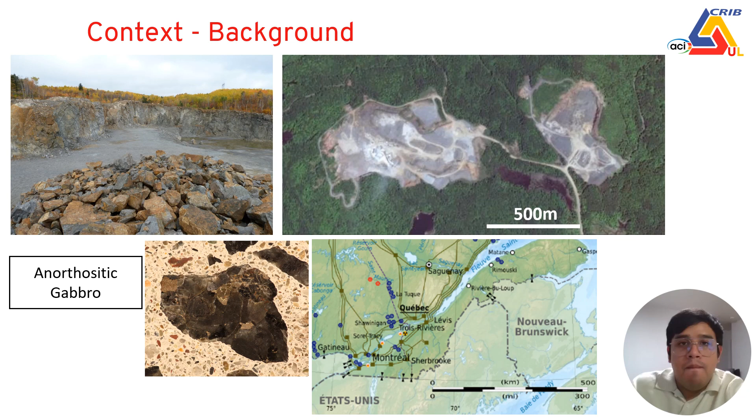So when we use this type of aggregates in concrete, two main reactions will happen if water and oxygen are available in the system. First is the oxidation process, and the second is the internal sulfate attack. I will explain in detail in the next slides.

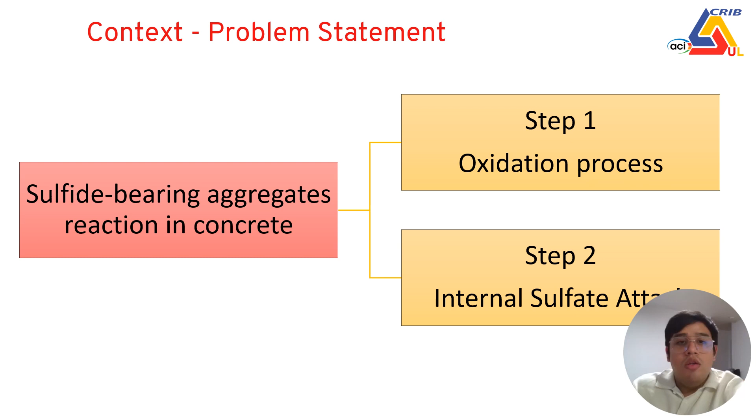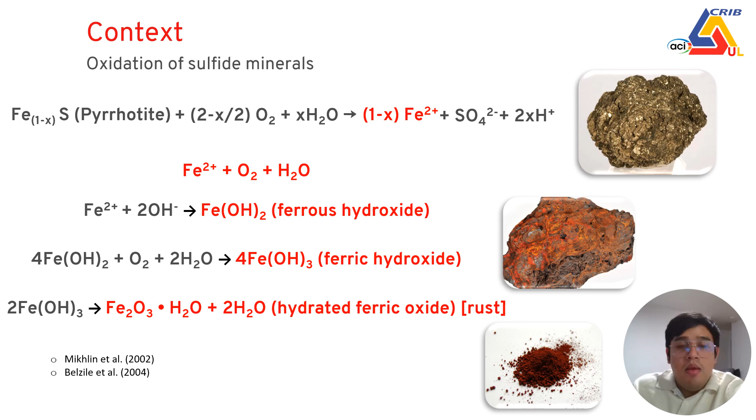So for the oxidation process of the iron sulfide minerals, principally pyrrhotite is the most reactive one, that can be activated by the oxygen and the water, so the iron will be released and will continue reacting with the oxygen and water available in the system to form the iron oxides or the iron hydroxides, as you can see here below. And we know the most common is the rust material, but this is not the only reaction.

So after the oxidation process is done, the iron sulfide mineral will continue releasing sulfur, and this sulfur will transform into sulfuric acid that will attack portlandite to transform into gypsum. And if we have water and an alumina source from the cement paste, the C3A, it will transform into ettringite.

And if we have the ideal conditions, like a source of carbonates, the silicium from the cement paste, and more water, we can form thaumasite. And thaumasite is a really destructive mineral for the cement paste. You can see here in the picture a concrete affected by this reaction.

Normally, there will be a whitish color around the aggregate. We say O-ring, and this O-ring is an indication that severe internal sulfate attack has already happened in the cement paste.

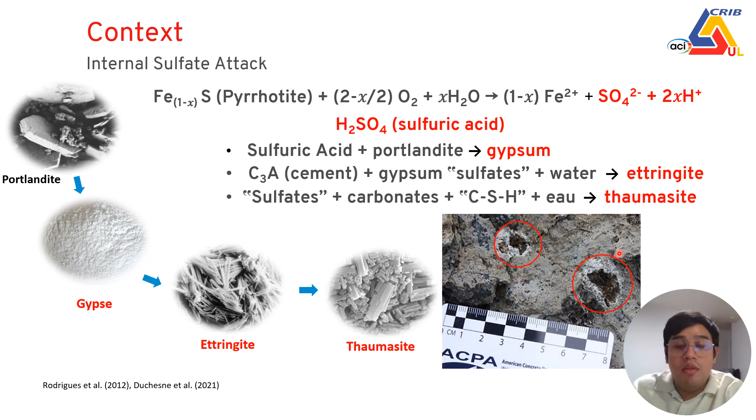Both reactions mentioned before will create secondary products that are really expansive. So they will start creating microcracking in the cement paste until it reaches the surface, as we can see here, in a bigger size map cracking effect.

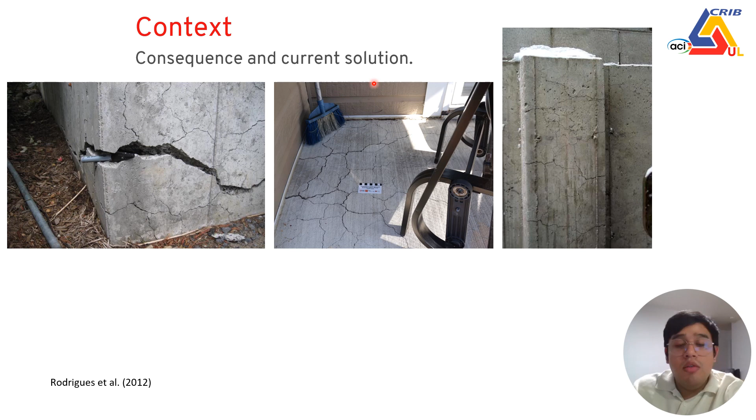So for this problem, there was not an easy solution, and the only solution that they could think of was to lift the houses, and the people were living there for around 2 months, and after that they reconstructed the foundation and then placed the house again on the site.

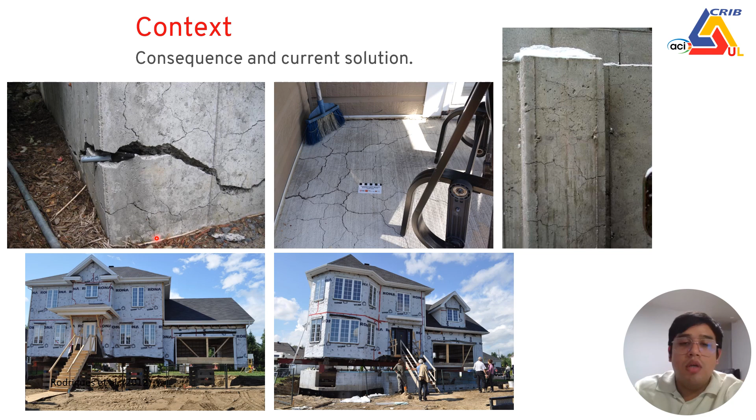So now I'm going to talk about the literature review that I have done for this project. During 2010 to 2015, there was a big project at University Laval to try to develop a protocol to evaluate the potential oxidation reaction of the sulfide-bearing aggregates that consists of a step-by-step process.

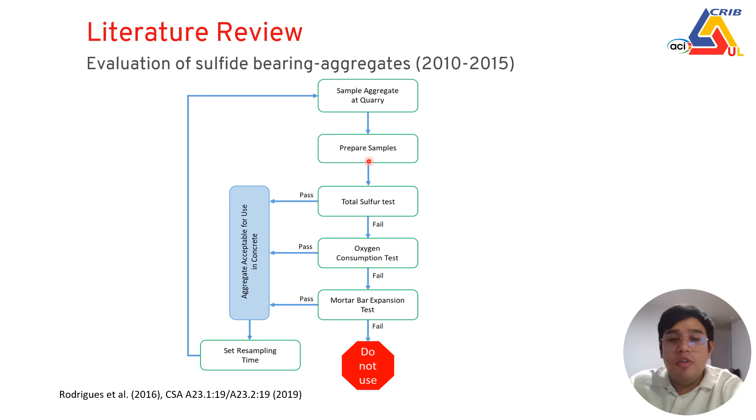So the first step is to prepare the samples, and after the samples are prepared, there is a total sulfur test to quantify the sulfur in the aggregate, and then an oxygen consumption test to see how the oxygen is consumed by this type of aggregates.

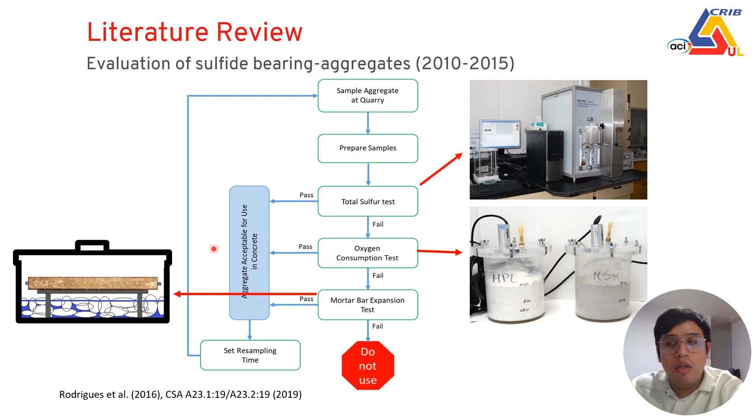And finally, a mortar bar expansion test where we measure the expansion to see how these products will be created in different conditions. So there are two different conditions in this mortar bar test: the oxidation with high temperature and low relative humidity, and the other condition that is low temperature and high relative humidity.

But there is not only one oxidation reaction in civil engineering work, so there is another type of oxidation reaction in concrete elements that we know as corrosion. As you can see here on the pictures, there is the iron attached to the steel bar that can suffer by the oxygen and water available and other agents that can accelerate or promote this type of reaction. So

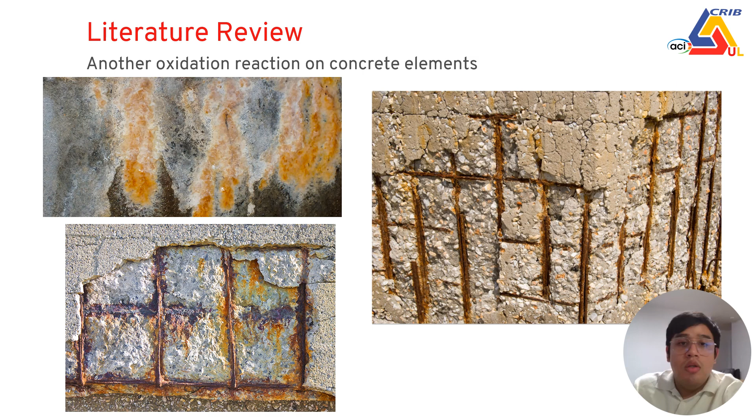a particular case grabbed my attention because there is something that we call pitting corrosion. And this pitting corrosion happens when chlorides arrive to the system. And this chloride will attach to the iron that is being oxidized. So this will create new products, and these products will release to the pore solution. Unfortunately, these new products are not in good connection.

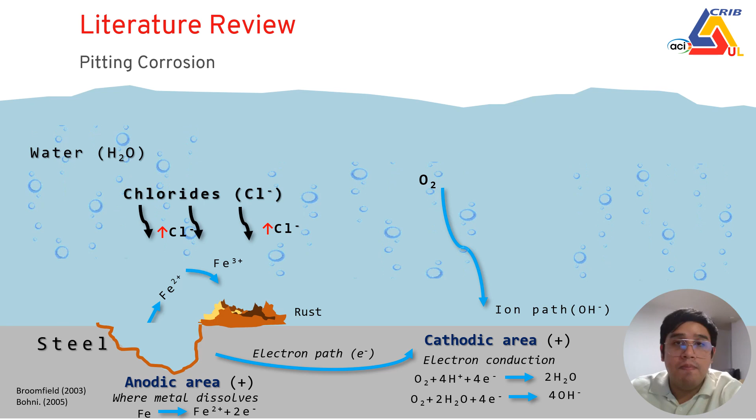They don't have good connection, so they will separate, and the iron will be free in the pore solution, making it available to the oxygen and water more easily to create more rust products. This is a way that we can accelerate or improve the corrosion in the steel bar. Based on all this information, I developed my research program.

Now you can see the big picture of my research project that starts with making new concrete under laboratory conditions, and we select two types of improvement of the oxidation with two different techniques. Today, I'm going to concentrate just on one, that is the electrochemical treatment, that consists in the chloride impregnation and the impressed voltage test. I will explain in detail later to generate or improve the oxidation.

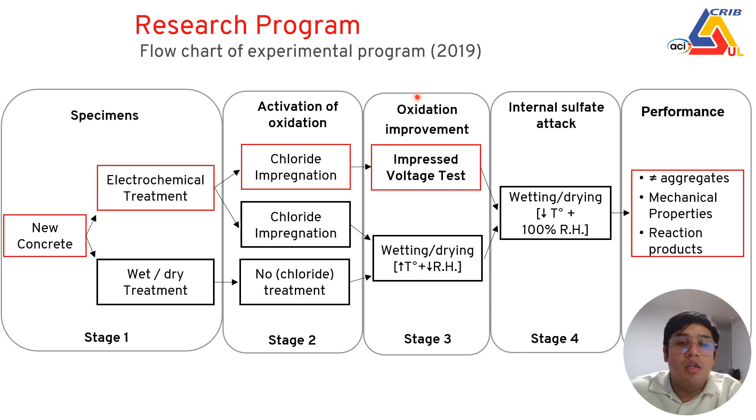And then we try to pass these specimens to a condition to generate the internal sulfate attack with low temperature and high relative humidity to see the performance of the aggregates after being submitted to this treatment. Now I'm going to talk about this methodology, how I developed this methodology.

So this methodology starts with the chloride impregnation of the electrochemical treatment. It's when we put a concrete specimen in an electromigration cell, and with the help of the voltage we generate the electrolysis of water, and chloride will be free in the system. This chloride will try to migrate to the positive part of the electromigration cell within the time. So we just need to wait.

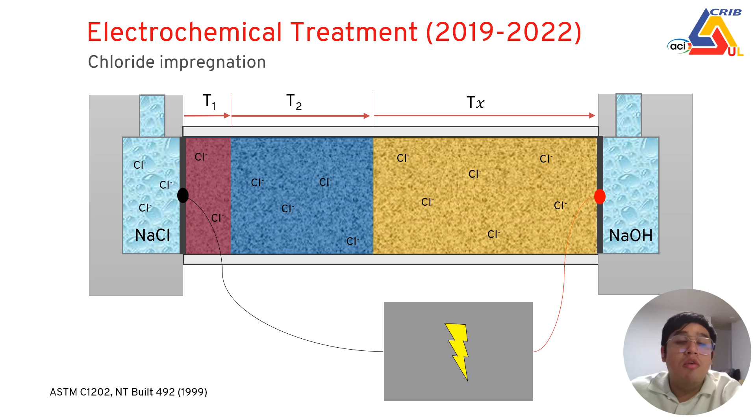This chloride little by little will migrate along the whole length of the concrete specimen until it reaches the other part of the solution. But it's really important to say that we need to control different parameters to avoid different attacks that cannot be involved in the damage of the sulfide-bearing aggregates.

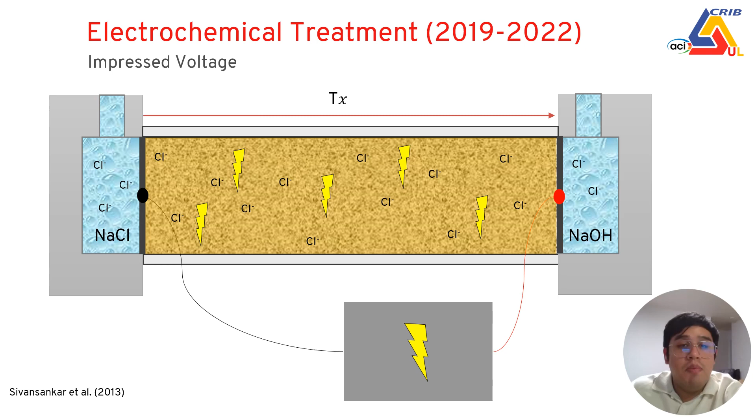The next step is to maintain this current for a long period of time to improve this oxidation reaction of the sulfide-bearing aggregates. And this part we call the impressed voltage test. To reformulate this testing for our purpose, I have to try with different materials, and during the early 2020s, I started working to develop a new electrode that can allow me to have the condition that I explained before.

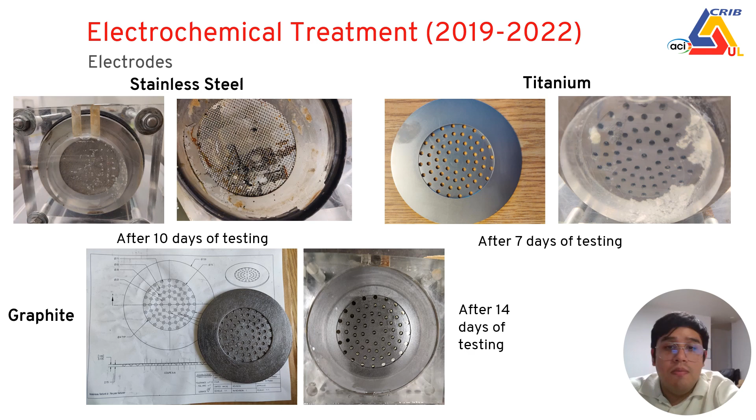So I tried with different materials, and we found that graphite was the better material for the purpose of my project. So the next step was to develop the electromigration setup because we have some setups already for the RCPT, but we need the long length of the concrete specimen so we can try different testing later to evaluate the damage or the detrimental effect of the sulfide-bearing aggregates. And here you have a picture of the final setup that I developed for these purposes.

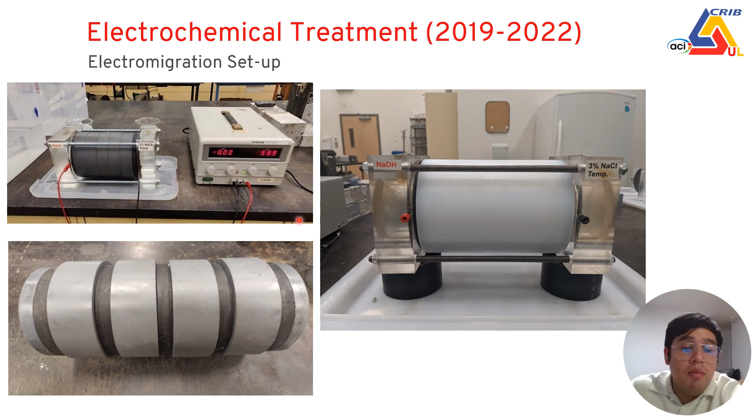Once the setup was properly developed, I had to confirm that the chloride impregnation was done on my specimens. So I started with a non-reactive aggregate to try to migrate chloride into the other part of the length of the specimen. So we tried the electrochemical treatment at different timings to see at what time we can reach our total impregnation of the chloride.

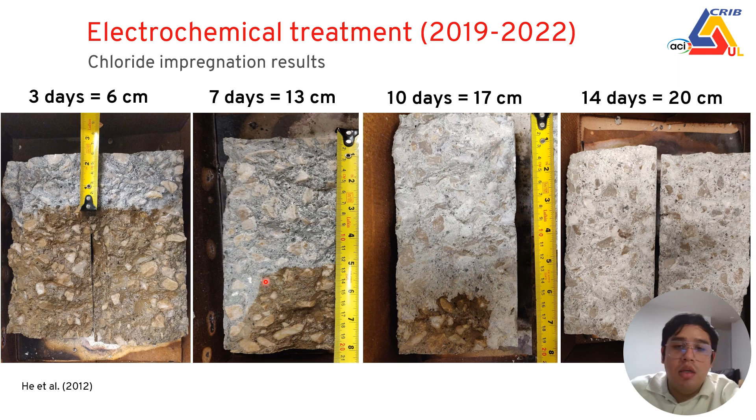As you can see here in the picture, at 3 days, 7 days, 10 days, and 14 days, how the chloride was migrating in my concrete specimens. And I use a colorimetric measurement by spraying silver nitrate on the concrete specimen. And we can see here in a gray or whitish color the chloride profile advancing inside the concrete.

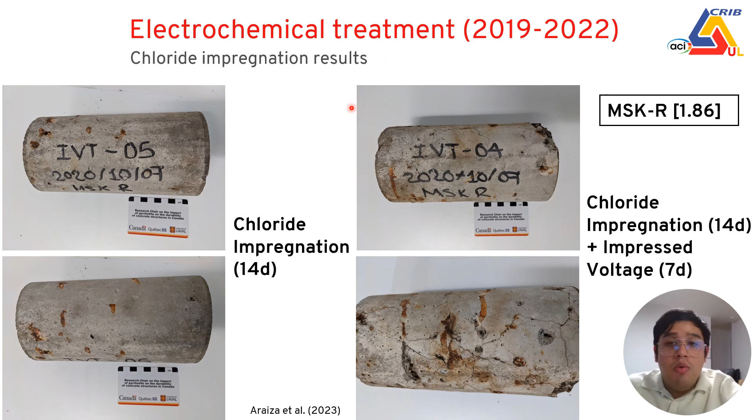So now we have a proof of that, and this electrochemical treatment is already published, so you can search and download the paper where I explain how I developed this electrochemical treatment to activate the oxidation reaction of the sulfide-bearing aggregates. Now I'm going to present some results about the development of this methodology.

When we talk about results, the question that always appears in the beginning is how to measure. The most important thing is that we already generate some damage in the concrete by the electrochemical treatment, activating the oxidation reaction of the sulfide-bearing aggregates, but we need to know how to measure this damage, if it's really contributing to decrease some properties of the concrete, and evaluate how it's going to be affected.

So we do some compressive strength and some stiffness damage test, that is a small cycling test on concrete specimens consisting of 5 cycles of compression and decompression of the specimen, and we can measure the modulus of elasticity and some other indices.

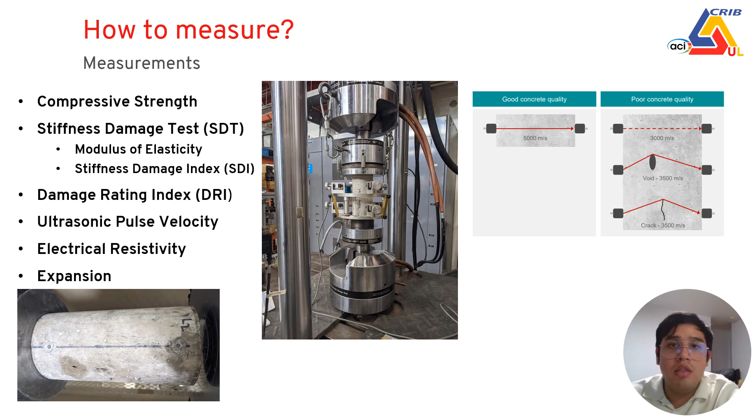As I mentioned before, we do this testing for two aggregate materials, one reactive and one non-reactive. The reactive one we identify as MSK 0.9 and the non-reactive material is PKA. These aggregates are similar, not the same, to see how the performance of each will be after the electrochemical treatment after 14 days, 28 days, 35 days, and 56 days, and see if we can find a measurement that allows us to distinguish when we have a reactive and when we have a non-reactive material, or to evaluate the potential oxidation reaction of this type of concrete materials.

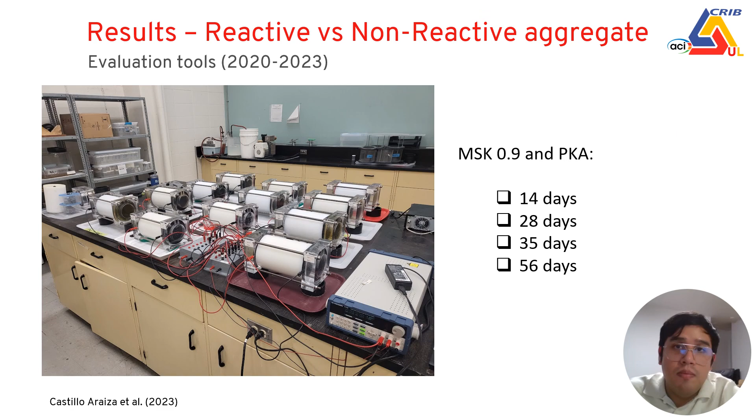After performing all the testing mentioned before, we found that the modulus of elasticity was the measurement that can show us the evolution of the detrimental reaction of the sulfide-bearing aggregate. You can see here in the graph the performance of the concrete at 28 days of curing and how it decreased as we apply more electrochemical treatment over time: 14 days, 28 days, 35 days, and 56 days.

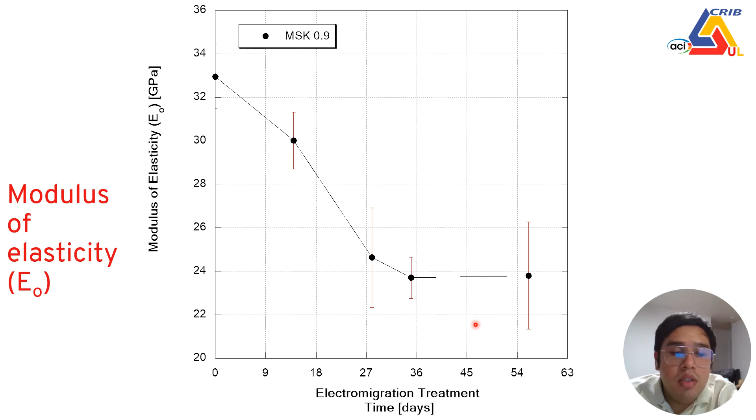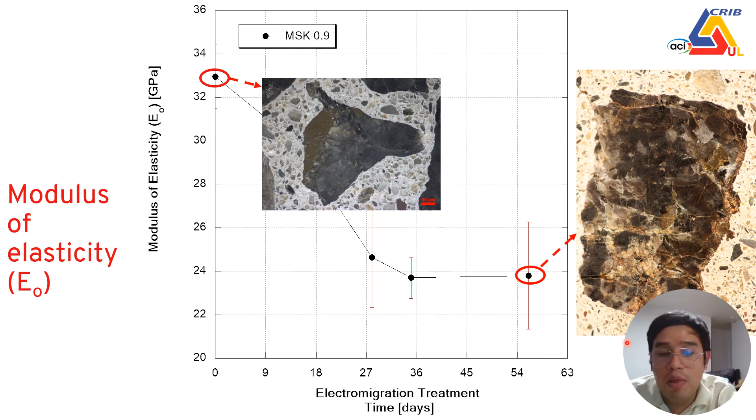But the most important result is that with the PKA aggregate we did not generate any loss of the modulus of elasticity, so that allows us to distinguish between a reactive and non-reactive material. The problem is that because they are different aggregates from different quarries, the performance is not the same. So for that, we need to create a new measurement that allows us to compare between different sources of aggregate.

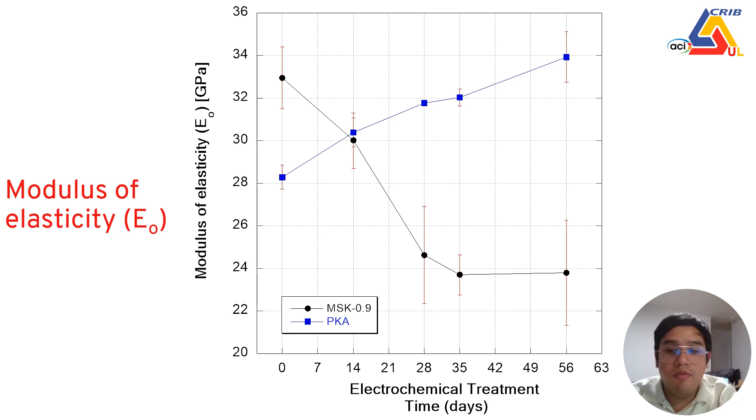To be able to compare two different sources of aggregate, we are proposing a new measurement that we call relative modulus of elasticity, and it is based on the modulus of elasticity obtained at 28 days of curing compared with the results that we obtain after electrochemical treatment: 14 days, 28 days, 35 days, or

56 days. And I present here how the concrete performs after this treatment, and you can see here the reactive aggregate, how it's losing on this property, while the PKA is gaining some on this property due to the hydration of the cement paste.

So here we observe something really important, that is that after 35 days of electromigration treatment, we don't really see an increase in the loss of performance of the concrete. So we think that with this percentage, we can really distinguish between a reactive aggregate and a non-reactive aggregate.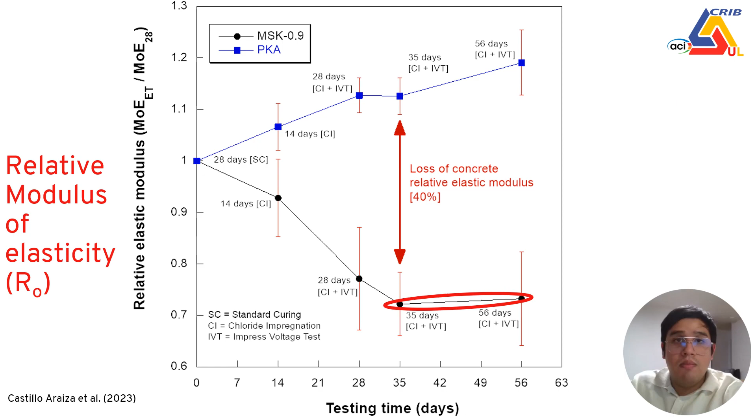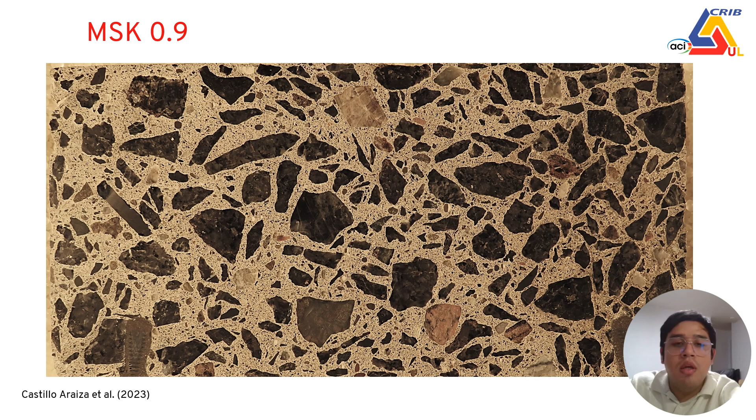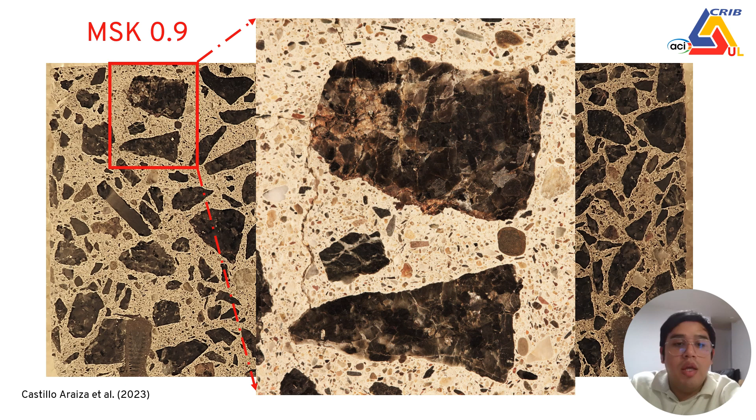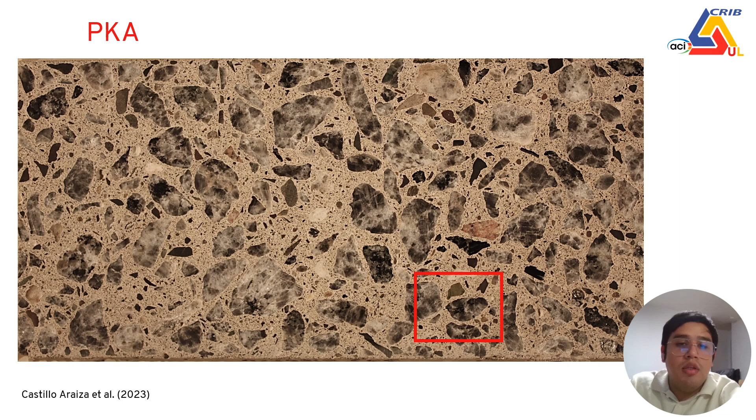So here you have an example of a concrete polished section after 35 days of electrochemical treatment. It's difficult to see on the screen, but if we zoom in, we can really observe the concrete affected by this reaction. And here you have an example of the PKA aggregate material, that is not affected by this reaction. If we zoom in, we cannot observe any cracks, rust products, or cracking in the cement paste due to this oxidation reaction.

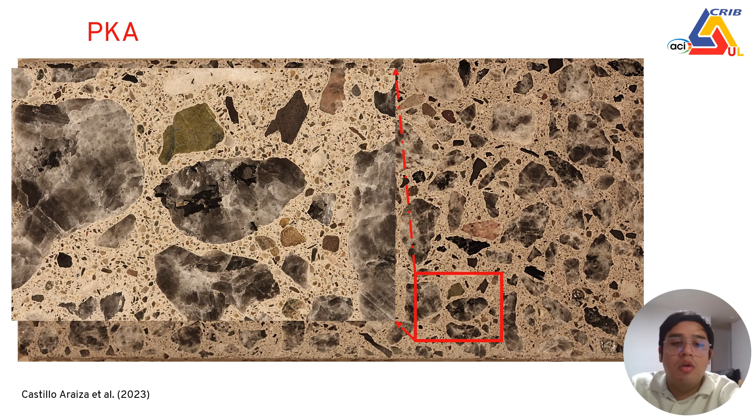The paper on all these experiments will be published soon, where I present all the results, the non-destructive testing, the destructive testing, and all the conditions and ideal parameters to measure the detrimental effect of this oxidation reaction, and how this measurement can allow us to distinguish between a reactive and non-reactive aggregate material.

Having defined the way we can activate and accelerate the oxidation reaction of the sulfide-bearing aggregates, and how we can measure if there is damage in the concrete specimen with ideal timing and parameters, we are now doing other testing with aggregate materials from different sources, principally a worldwide known aggregate that presents reaction on site, from Connecticut, USA, and another aggregate from the Trois-Rivières region that is not really reactive, but is probably on the limit where it can present damage in concrete.

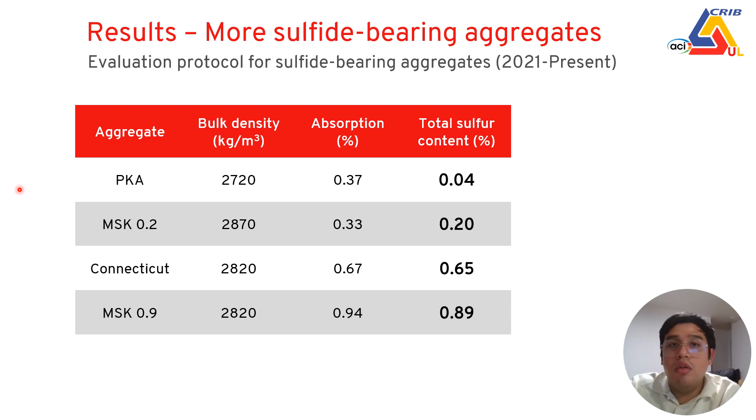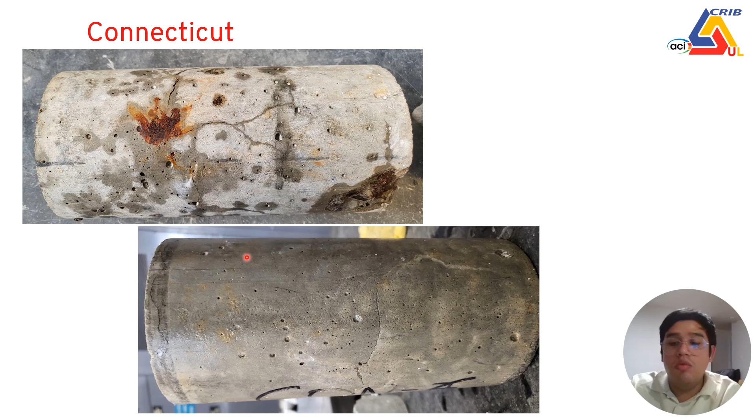Now I will present how the concrete specimen with the Connecticut aggregate finished after 35 days of electrochemical treatment. You can see how it's really affected, with rust products, a lot of cracks and some pop-outs, and really big cracks with orange and yellowish color due to the sulfide-bearing aggregate reaction.

Now I will present some conclusions and perspectives. In conclusion, this new methodology can evaluate the potential oxidation reactivity of sulfide-bearing aggregates under laboratory conditions in a shorter period of time, and the polished sections showed that the cracks are highly correlated with the bigger loss of the modulus of elasticity.

Also, measurements of the modulus of elasticity are the better parameters to evaluate the potential harmful reaction of the sulfide-bearing aggregates, and the proposed relative modulus of elasticity can really distinguish between a reactive and a non-reactive aggregate.

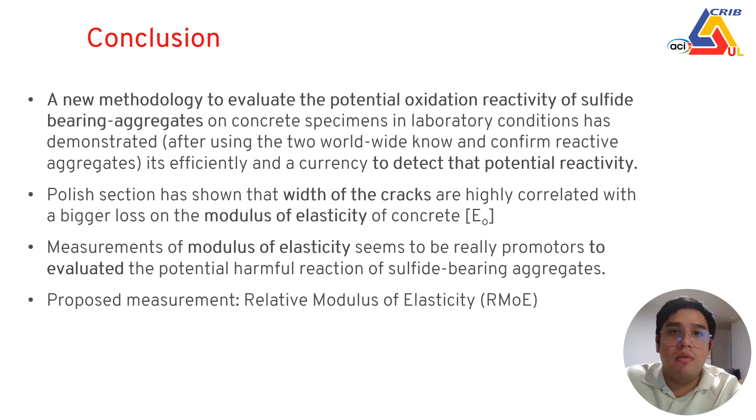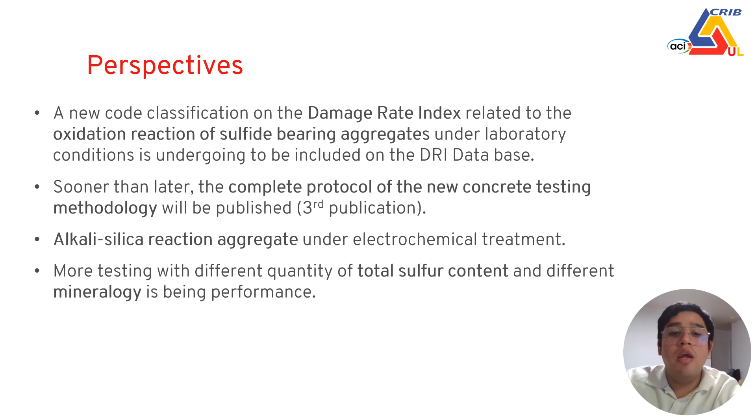In our perspectives, we are now working on a new code for the damage rating index related to the oxidation reaction of sulfide-bearing aggregates. We want to complete our testing protocol with a complete methodology to evaluate the potential oxidation reaction of sulfide-bearing aggregates. At the same time, we are working with alkali-silica reaction aggregates under electrochemical treatment, and more aggregates from different sources and with different total sulfur are being tested with this methodology.